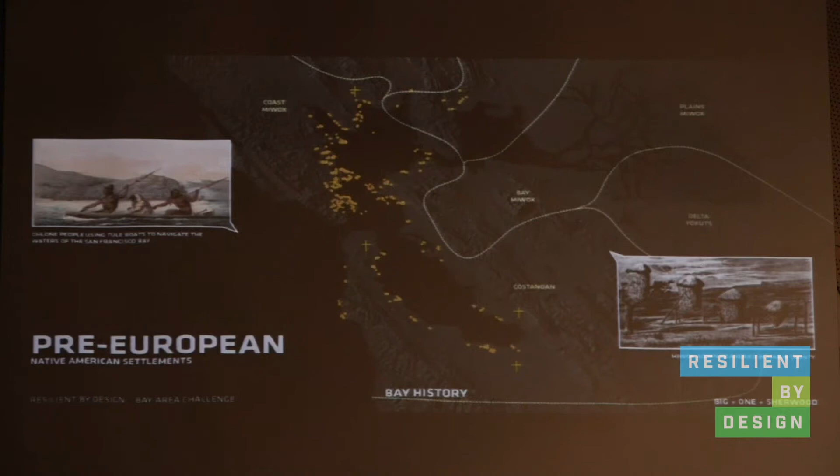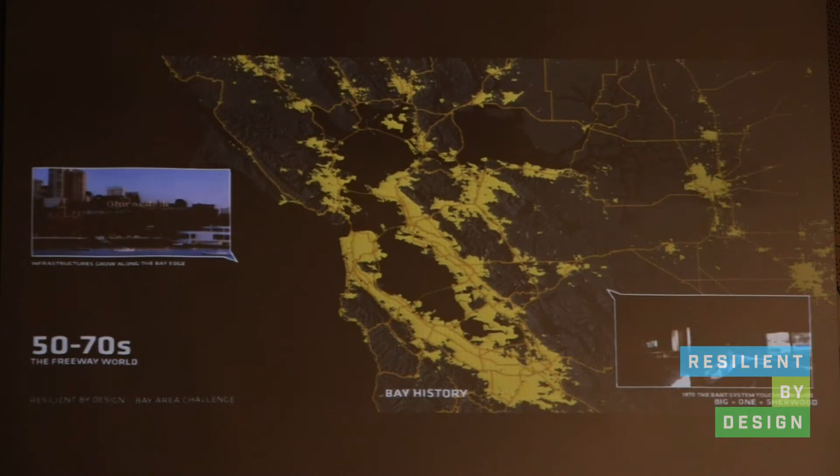At the same time, that occupation is the very thing that threatens it. If you look from early settlement, Native American, to a series of towns during the gold rush, the Bay has just kind of been expanding sequentially to the point that now it really works as one region, but at a scale that is disproportionate to any means to control it.

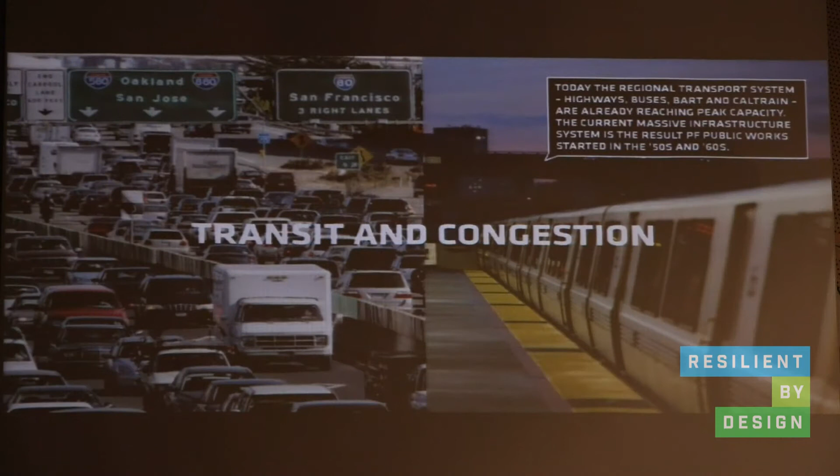And it's that kind of sprawl and development pattern that has led to the urban challenges that we know today, from transit and congestion to housing, lack of affordable housing and displacement that results, strained infrastructure bringing flows from far away, and ecological decline along the Bay's edge.

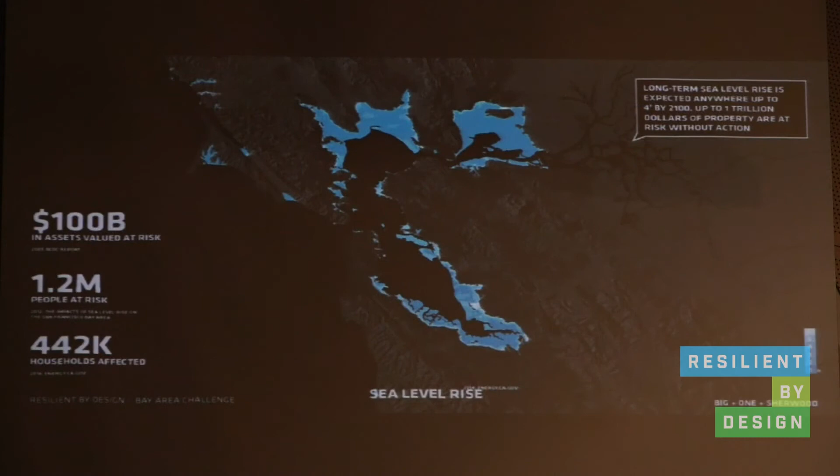Those development patterns and the kind of emissions and lifestyle associated with it have also been in part responsible for the climate stresses that the Bay feels today: from sea level rise and storm flooding, to drought and wildfires, to earthquakes and liquefaction.

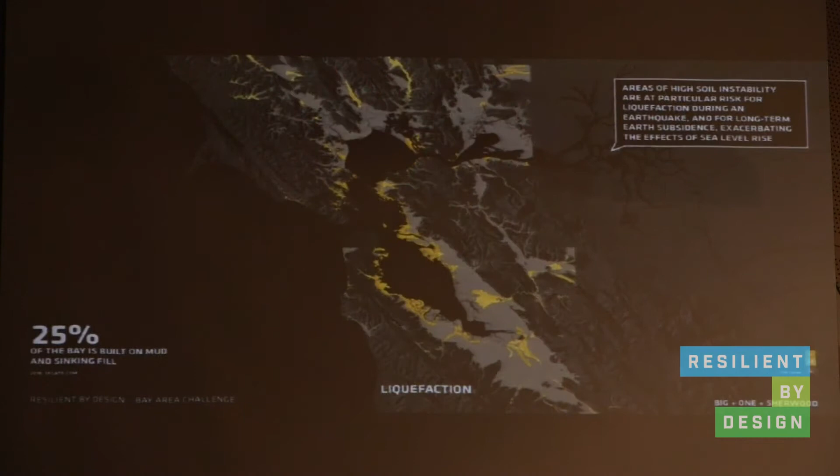Our approach to the Bay has been that climate stresses and urban stresses are really one. And in order to build a more resilient Bay, we need to work on both equally.

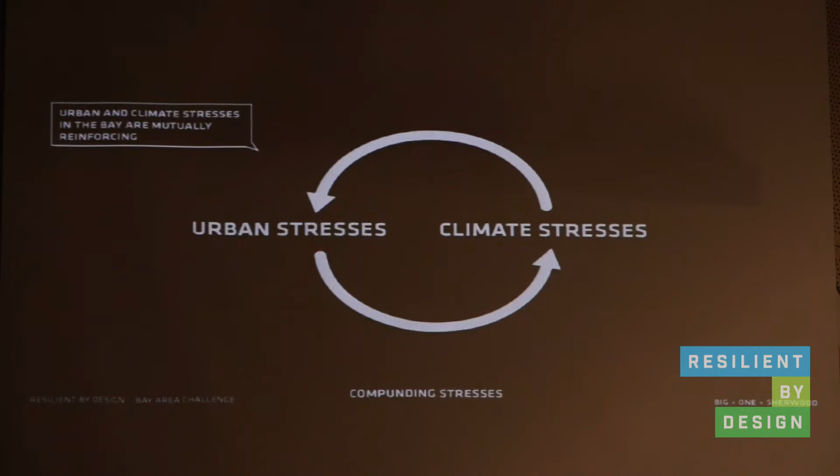Simply put, to become more resilient, sustainable, and equitable, and to deal with some of these challenges, the Bay needs to link its natural systems to its urban systems in a better way. It needs better transit. It needs more housing in the right places. And it needs to modernize and decentralize its infrastructure to build resiliency.

We're also cognizant of the way that things are done in the Bay Area, which is also a symptom of many cities, certainly in this country, where the silos of city making really don't talk to one another. I think in the Bay in particular, you see ecological discussions completely separated from urban discussions. Transit works on its own logic, and infrastructure and people all kind of work separately.

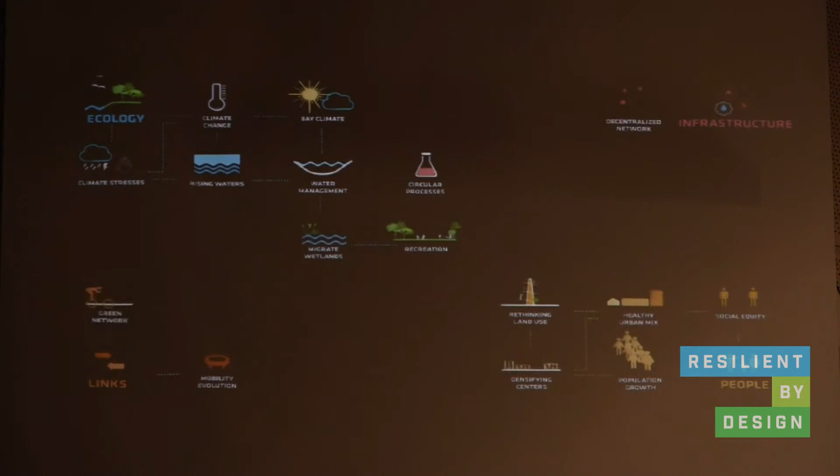Simply put, our proposal is that we need to think of all of these elements together as one, what we call a social ecosystem, where ecological planning provides a framework for growth, where growth responds to transit rather than the other way around, where all the incredible ingenuity and resources of the people of the Bay work to develop these systems, and where infrastructure is decentralized and localized into community.

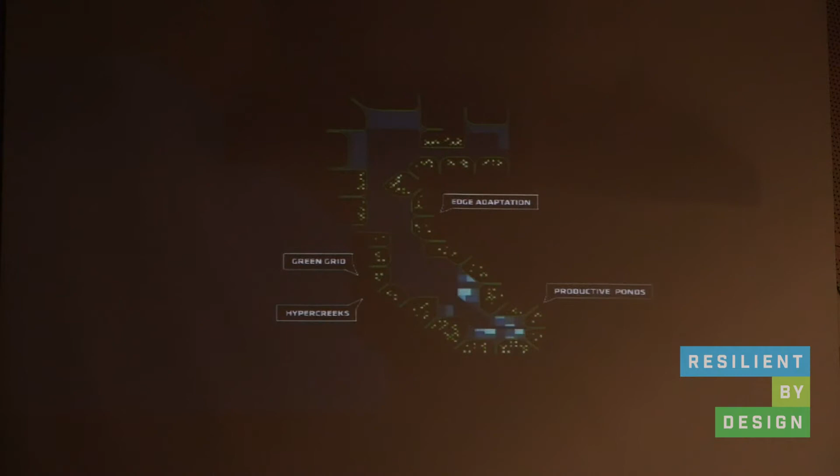Beginning with the creek system that once really defined the Bay, that's been culverted and tunneled over years and sprawled around—can these creeks become a new kind of framework for the Bay, allowing for an increment for sea level rise adaptation and a new unit of community?

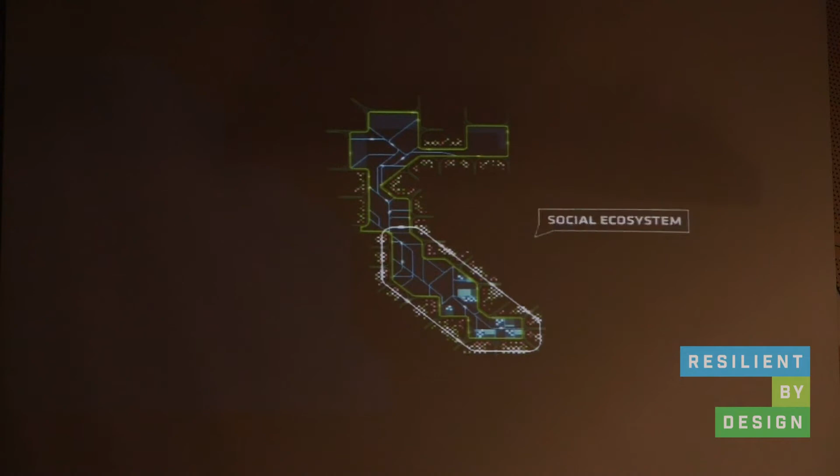Can we peel back decades of paved-over surfaces in the uplands, allowing for better recharge of the groundwater and fighting drought? Can we use the assets that the Bay has to build better transit rather than building new shiny infrastructure—use our roads, use the Bay itself, use our trails, and better connect things in a more flexible way? And can we rediscover the edge of the Bay, both as a place for ecology, but also as a place for people?

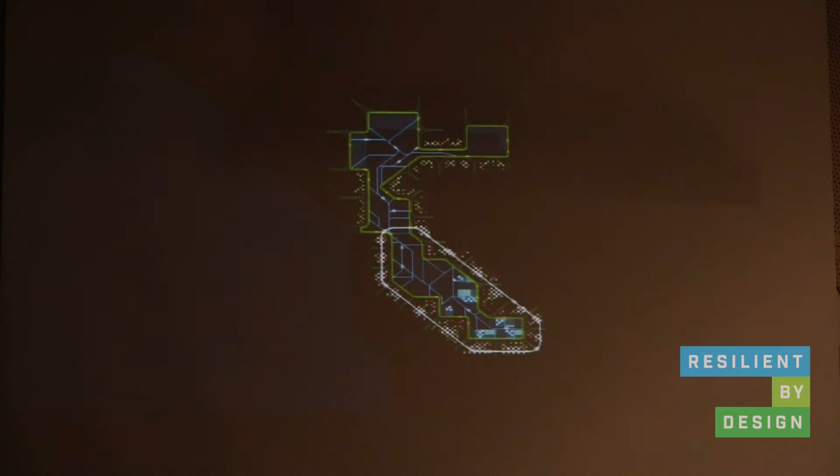So we've looked at three design opportunities, and to give you a sense of our process, we'll start with the first one up at the Golden Gate. Given that the initial frame for this competition was sea level rise, and it is one of the more acute risks in the area, we were curious about the dynamic between local adaptation, which we think can and should take place in order to adapt to sea level rise. It might happen in different ways in different parts of the Bay.

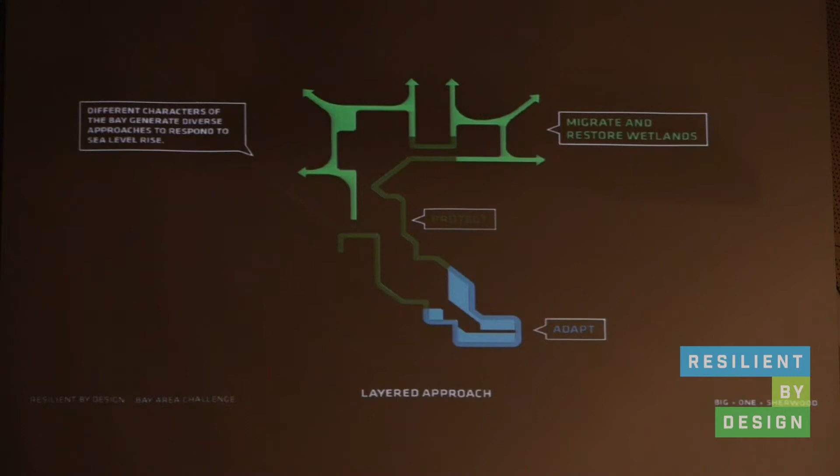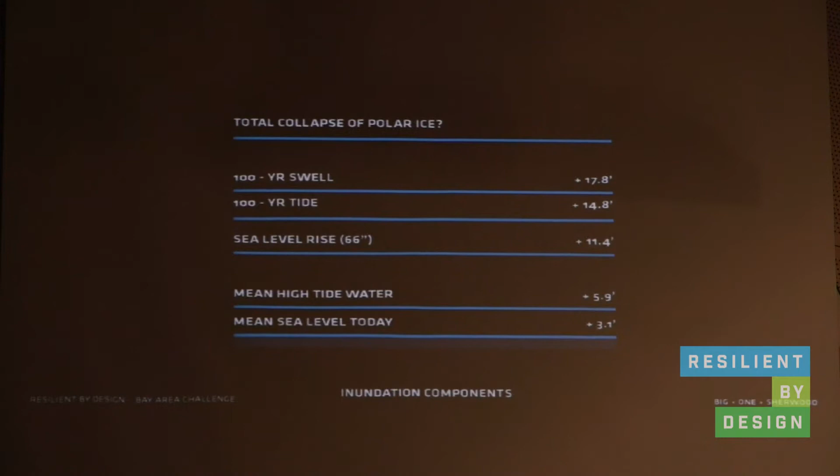But we also know that there's a lot of uncertainty about the extent of sea level rise and the kind of numbers we're going to be dealing with in the future. So we were interested in looking at a regional strategy that would take a component of this risk, tidal, annual king tides and storm surge, and deal with it on a regional level.

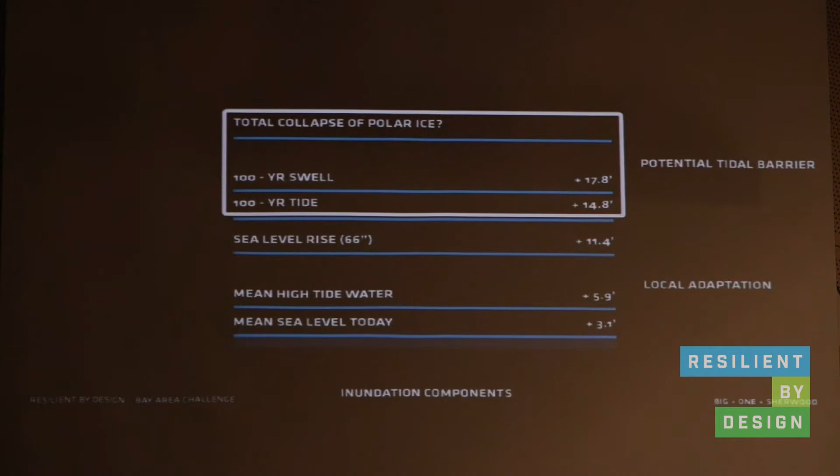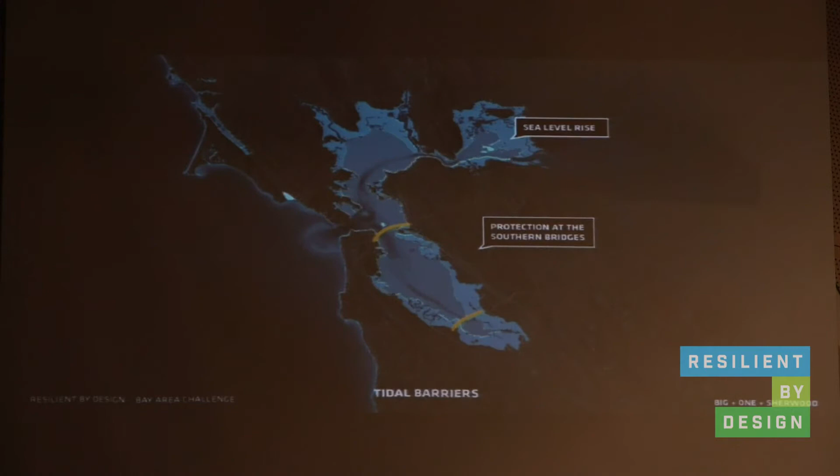We looked at the difference between 500 miles of investment in levees to keep up with potentially extreme height, and also a series of locations for tidal barriers, including the Dumbarton Bridge, the Bay Bridge. And then we looked at the Golden Gate Strait itself, the location of the BCDC competition several years back.

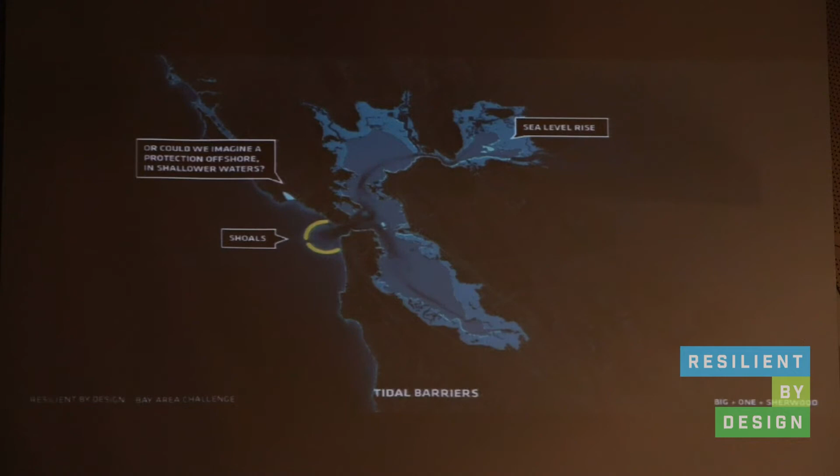We developed an alternative proposal for this area, which would build on the 7-mile crescent of shoals left by sediment deposit coming out of the bay. Using about 30% of the material it would take to build a barrier in the deep prism there, about 7 million cubic yards of fill, you could create a barrier that would take care of those more extreme levels of sea rise and tidal inundation while allowing for maritime traffic and so on. So this is something that we think is interesting.

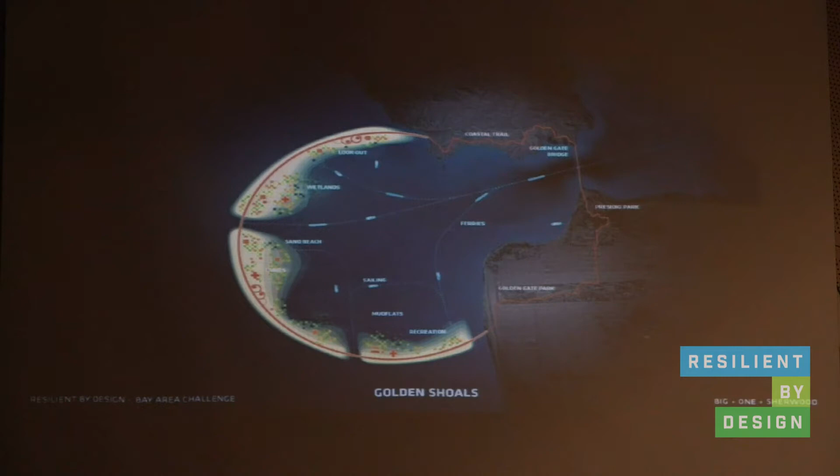It's something that we think should be looked at, but we also focused our attention on a series of other sites at a more local scale, starting with Islais Creek.

Okay, thanks, Jeremy. I will do my best to see the screen at this angle. Well done. Bry Sarté with Sherwood Design Engineers.

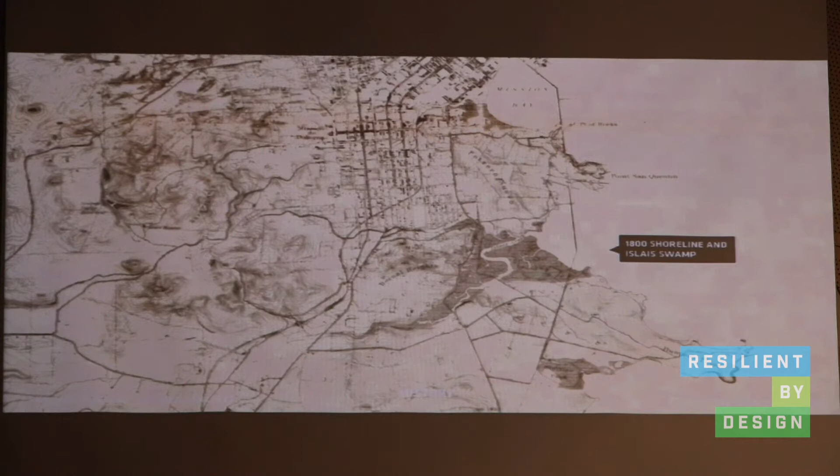Islais Creek is, I think, a really important site that's been at the center of a lot of the industrial activity in San Francisco, and is also the site of one of the original ecological and wetland systems that no longer exist in any serious scale in San Francisco.

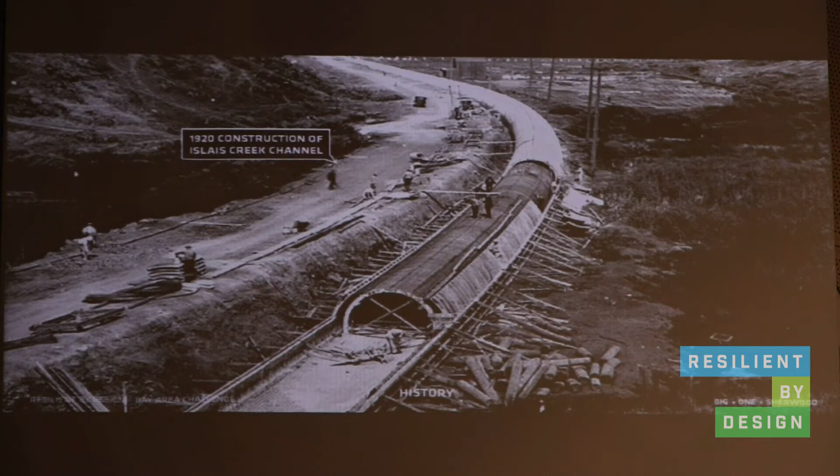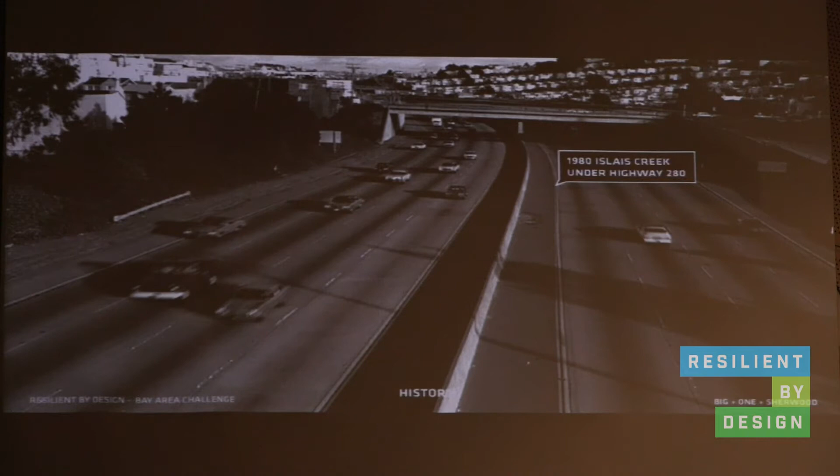This part of San Francisco was culverted and put into creeks at the formation of the city and the development of the southeast part of San Francisco. The need for the expansion of freeways and circulation infrastructure has added additional layers on top of Islais Creek for circulation and transportation.

Beyond that, this has become a hub for a lot of the maritime activity and port activity on the waterfront, which has changed in nature and scale over time, but still has a deep water harbor and significant productive use, including providing a number of jobs, which we've heard from people living in the neighborhood are extremely important to preserve in that location.

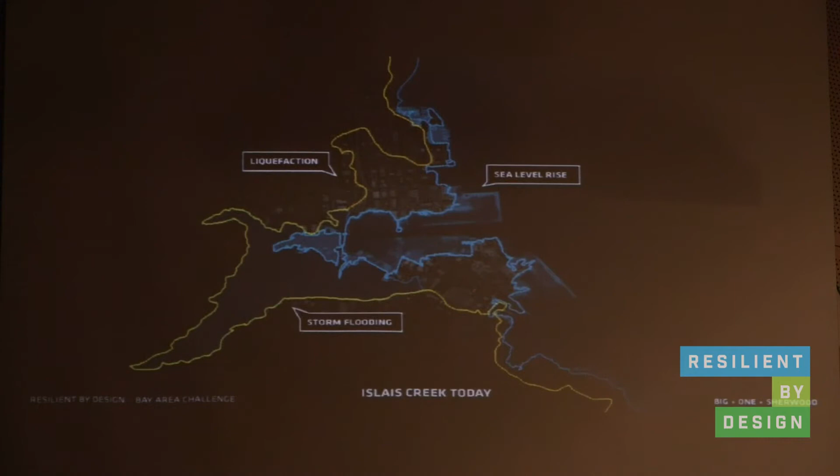It is a very challenged part of the city from a sea level rise and flooding perspective, not just at the waterfront, but all the way up to the top of the ridge near Twin Peaks, where in this watershed basin there is flooding very often that creates a combined sewer flood condition in a number of parts of the neighborhood. So our proposal would start to address that, and in particular, much of the industrial land that is in purple in this slide is positioned in what was historically marshland in this part of San Francisco.

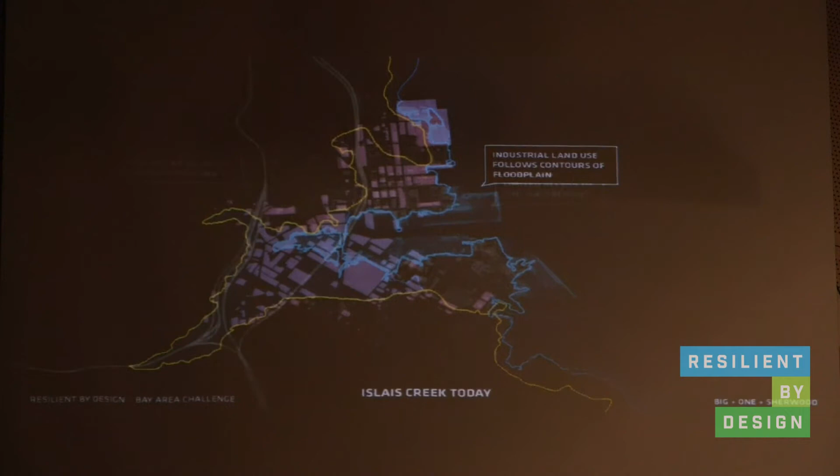Here we've overlaid the major 2 freeways that run through this neighborhood that effectively connect or pass over the 2 residential communities of the Dogpatch and the Bayview, Dogpatch to the north and Bayview to the south.

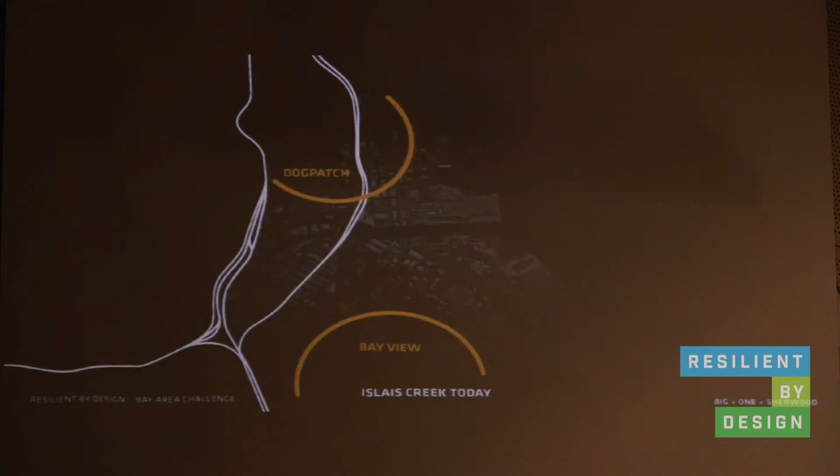So we see this part of the city as an incredible opportunity. It's one that the city has put forward as a design opportunity for us to consider, and so we've taken a really bold approach, we believe, to say what could be possible here. It started with listening to people in the neighborhood, to touring all the different sites with many of you.

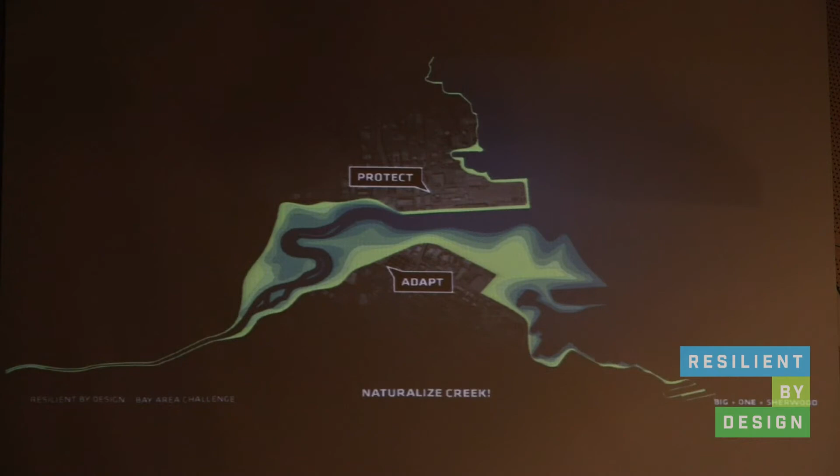Our proposal starts with an idea that really says, could this be a place where San Francisco creates a 300-acre restored wetland and riparian system as part of a restored marsh? Could we take what is now a small inlet that once was one of our most important creekways and really restore it substantially to the south and to the west, and take advantage of a rare, if not the only, last opportunity in San Francisco to really think about managing stormwater and floodwater in a different way.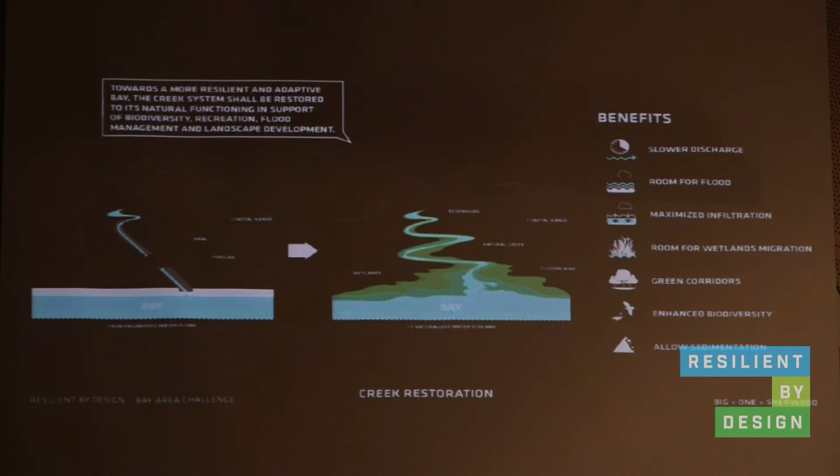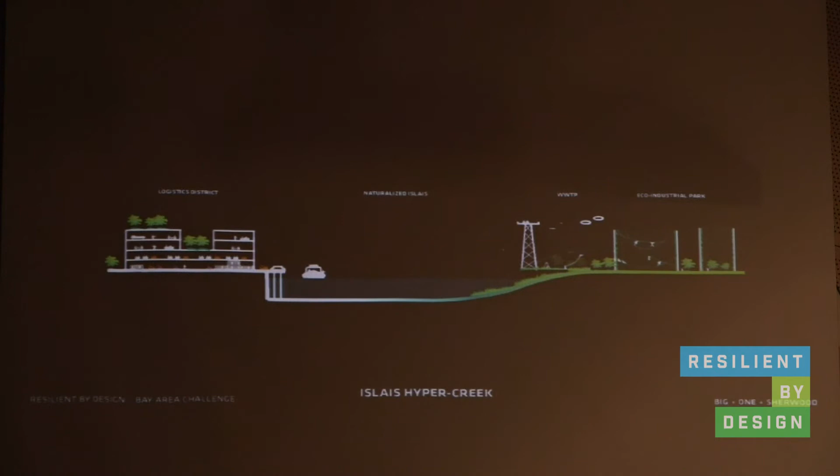And to take the existing channel and transform the southern side, to take some of that 300 acres of industrial land to create vertical industrial development opportunities for a net positive increase in density and development of this neighborhood, to provide more jobs than there are today, but in a more compact location that allows the ecology of this to come closer to its original form.

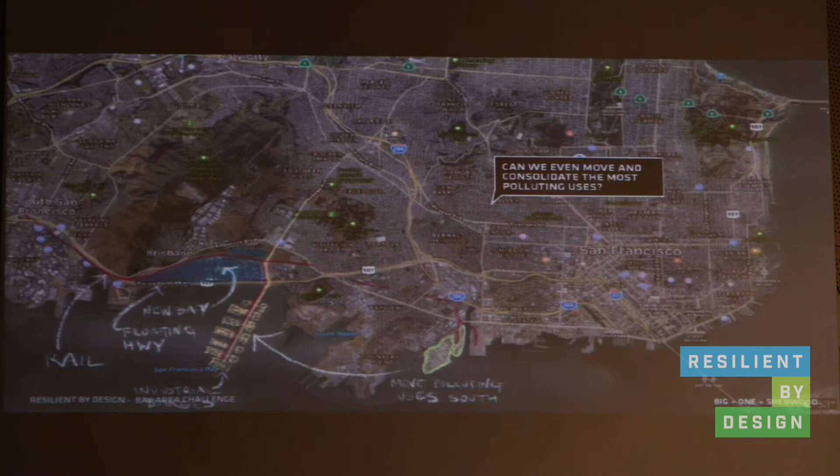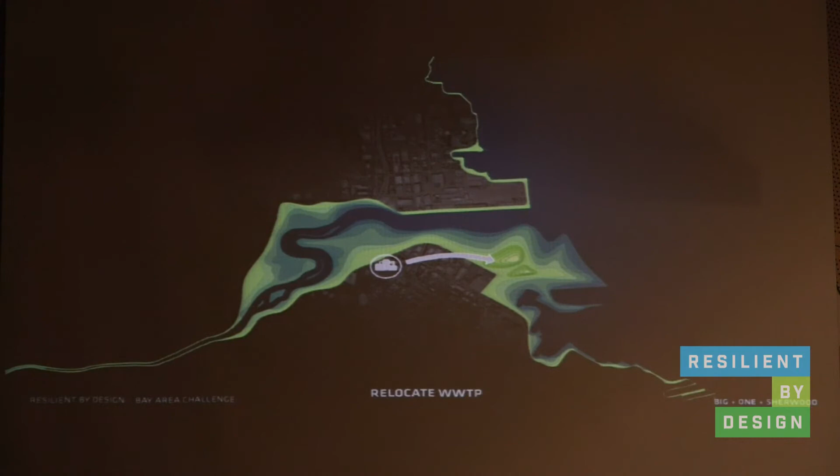So you can start to see this evolution that might actually be facilitated by moving some of the heavy industrial uses potentially to a new series of barges or a reconfiguration of Brisbane Bay to the south, and potentially even relocating parts, if not the entirety, of the wastewater treatment plant currently adjacent to the Bayview neighborhood. We don't have all the answers in the sequencing, but we have a good idea of the process today and the potential evolution to more ecologically integrated means of managing and processing wastewater at this massive facility, which today takes 80% of the city's wastewater.

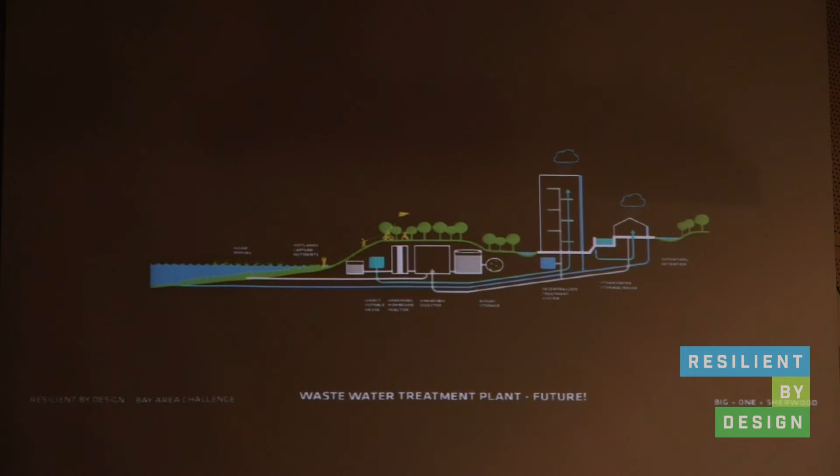Could that start to be thought about differently? We think so as part of our proposal. And I think Jeremy is going to continue with a couple more ideas.

Sure. So this gives you a sense of the resource recovery park and plant on the edge that Bree just talked about.

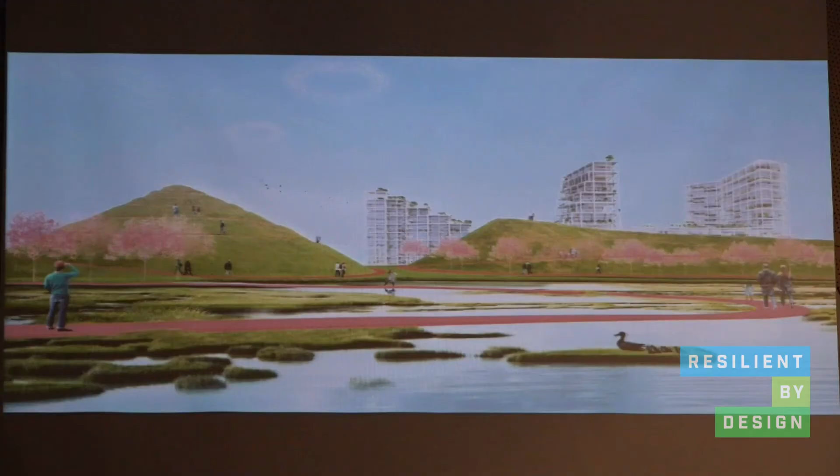So what all of these infrastructural improvements do is provide a frame for resilient growth. And as Bree said, what we heard loud and clear from the community when we visited was that the kind of industrial jobs in the neighborhood should not just be protected, but increased.

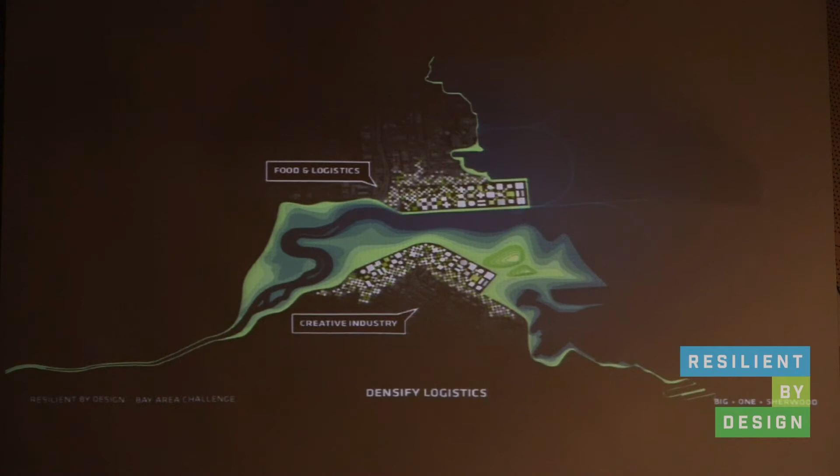So what we propose is a densification of industry, logistics connected to the Deepwater Port, maintaining this area as a critical node for San Francisco to its south, and taking this low-rise industrial area that sits in the floodplain and really densifying it.

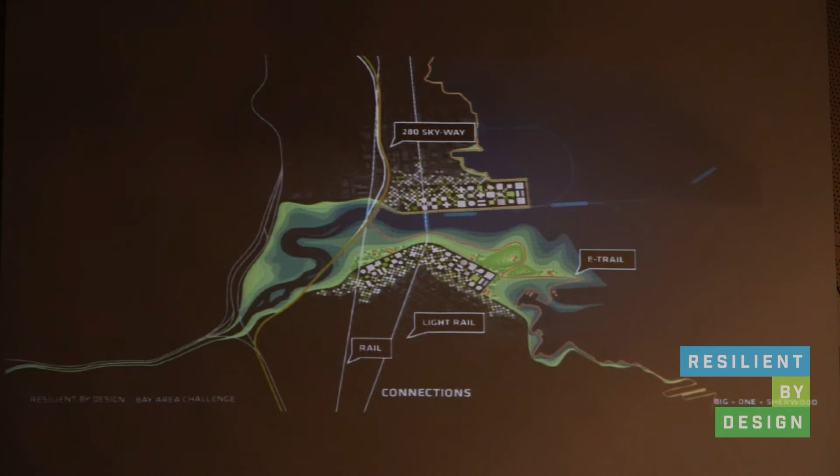We also see opportunities to connect. I-280 has been contemplated for a long time, this spur that juts off of the 101 and runs north, for decommission and potential demolition. For us, the cost of demolishing it might actually be better spent to enhance it, not as a machine for cars, but rather as a machine for light mobility, for pedestrian connectivity, with spurs reaching into the neighborhood.

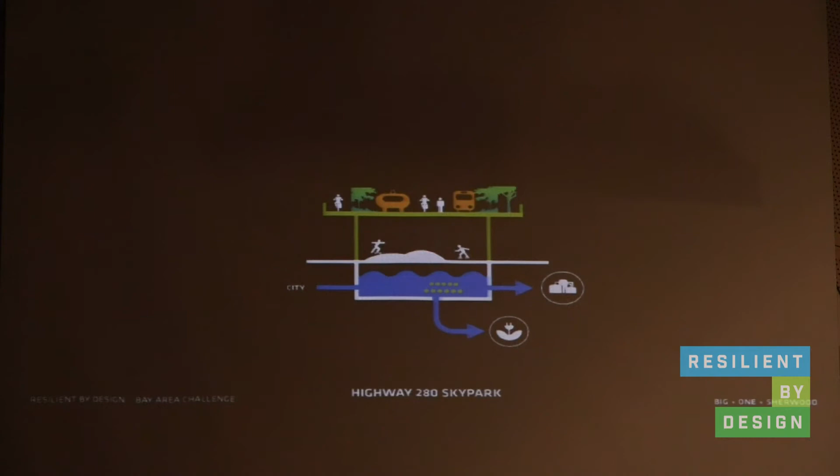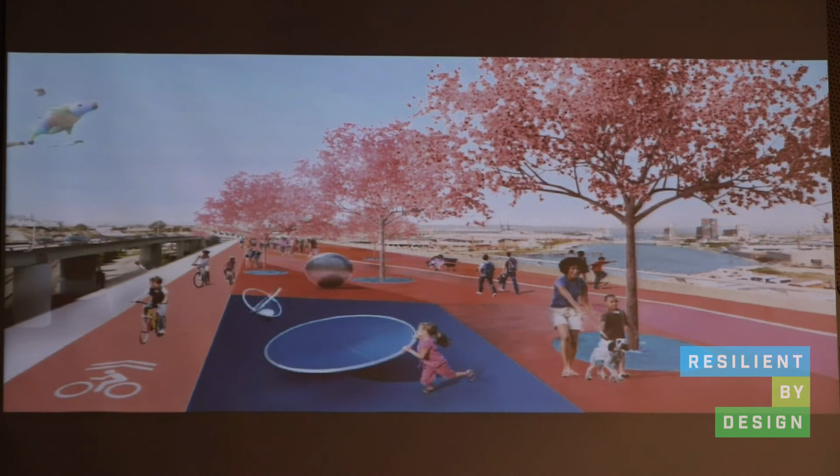This is Islais Creek in the background. So from a gray, kind of tunnelized, culverted creek, disconnected along the transect, to an activated natural and also industrial heart for Bayview.

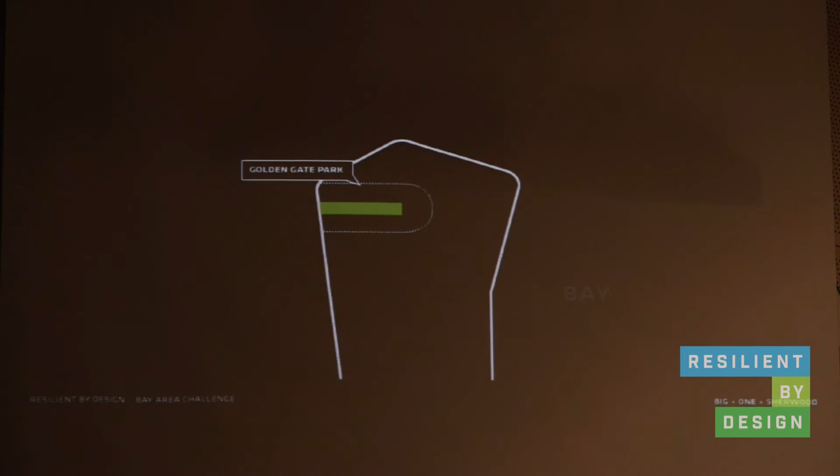We also see this really as no small plan. If San Francisco itself has Golden Gate, which serves a huge area around it, there's really a lack of this kind of open space in this part of the city. So we really see Islais Park as the green, resilient, and industrial heart for this part of the city.

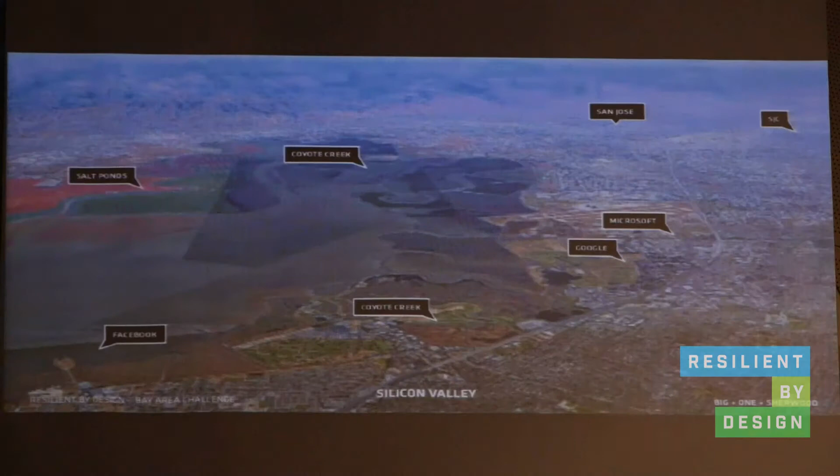So I'll talk a bit about the South Bay design opportunity that we have. And of course we call it South Bay Living because we think South Bay is known for many things, but not really for living. If you can even afford it, it's not good for living. It's for traffic jams, it's for Silicon Valley, it's for inequity and all these things.

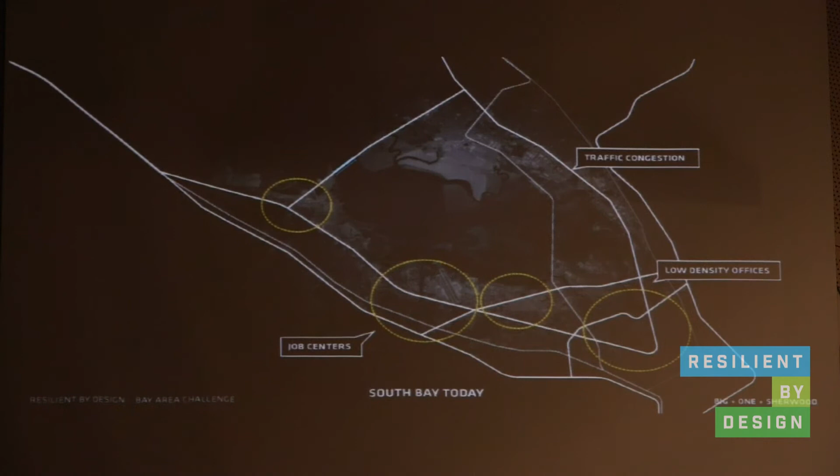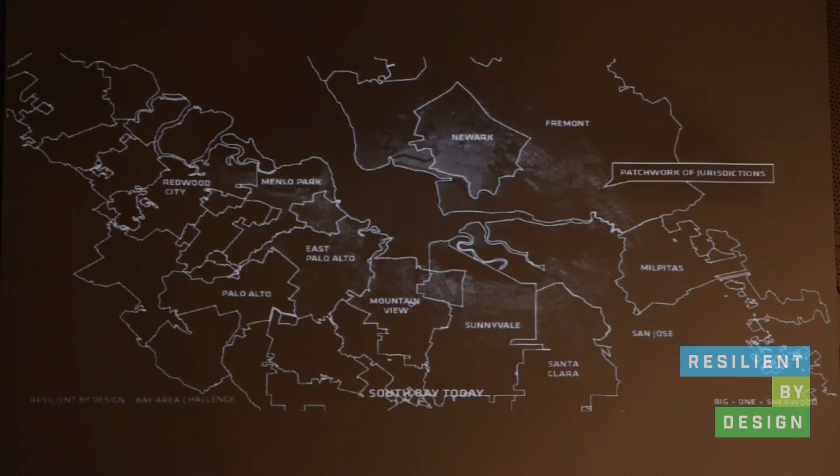One of the things about South Bay is that you see many of the urban stresses coming together there, and those will be compounded by climate-related stresses from sea level rise. We feel it's very difficult to address these stresses so far, in part because of the atomized way in which the Bay has organized itself.

So what we think and what we want to propose is a systems perspective on the South Bay, which maybe starts with thinking about mobility and transit, where you see that it's really car-oriented. Caltrain comes there, but hardly anyone ever uses it, which is logical because there's no way to get from the stations to the different workplaces that are there.

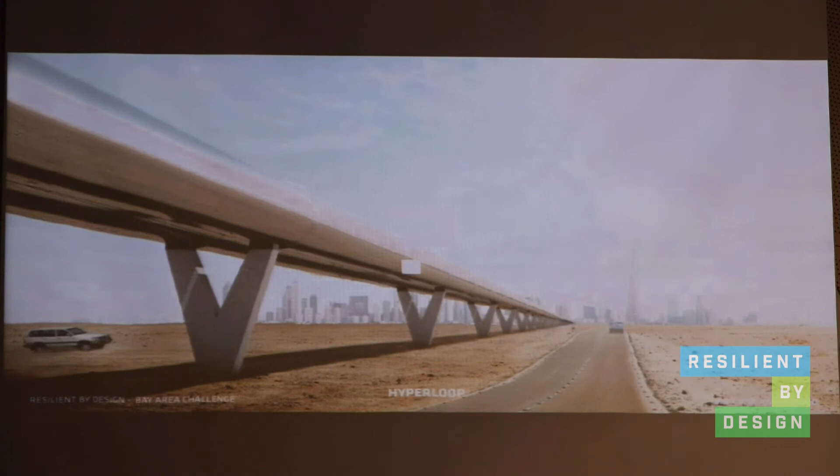And that's why even big ideas, which we all enthusiastically work on—specifically Jeremy and his firm, like the Hyperloop—are things we don't think are opportune here. We think that, especially given the innovative culture there, you might really look at developments in mobility technology, and look at the existing assets that are there: the trails, the highways, maybe even the ferries.

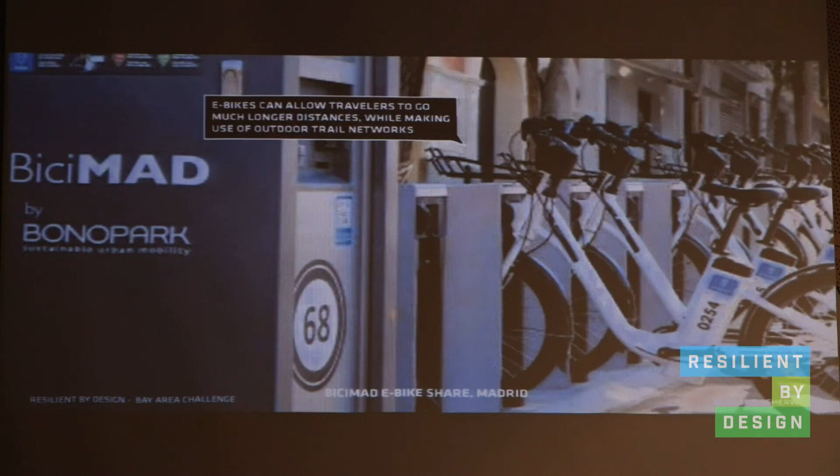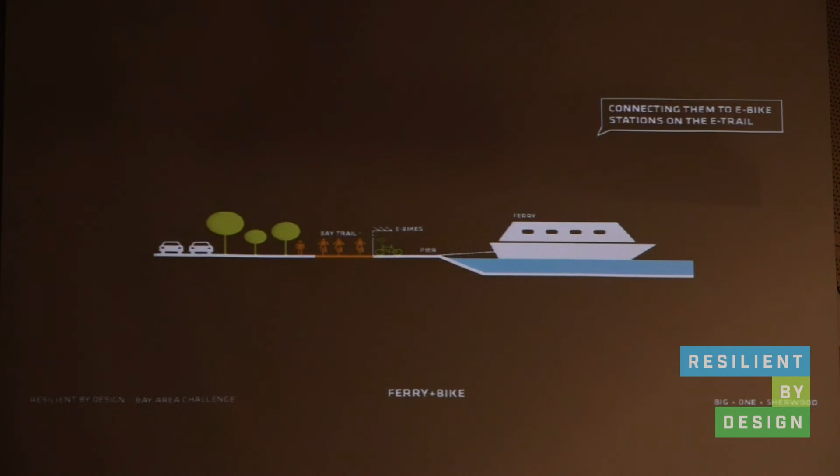So we think that if you want to approach mobility, you might start thinking: can we activate these trails for e-bike mobility? Can we start to think how these e-bikes could connect both to the uplands, to the different workplaces, but also maybe to a ferry-related system. This ferry boat is of course too big and would have difficulty getting into the South Bay, but you can imagine that in the future, especially with sea level rise, there are whole new sets of ferry technologies that can actually work very well there.

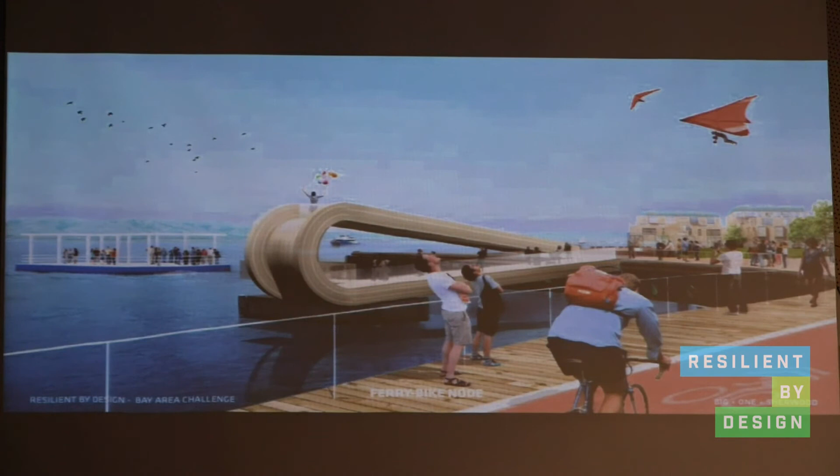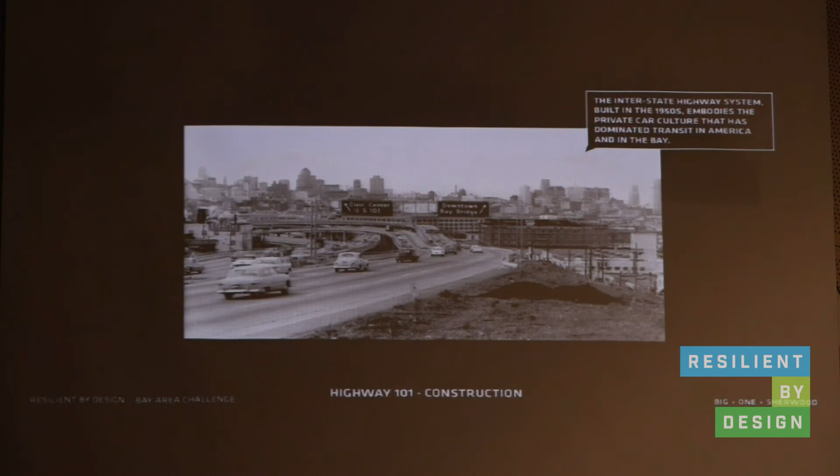A second component of that mobility strategy would be to rethink the highways, which are now big, clogged arteries through the South Bay.

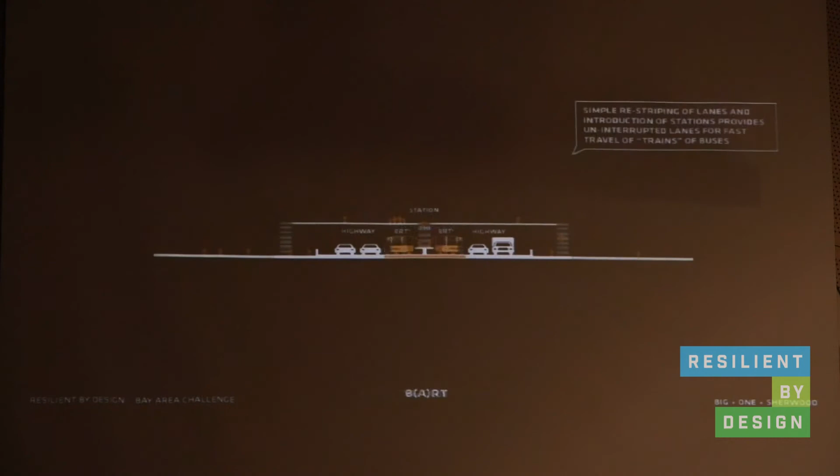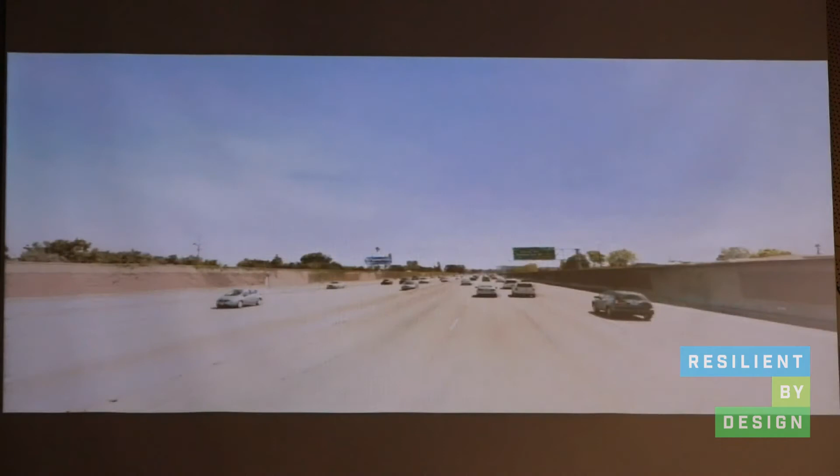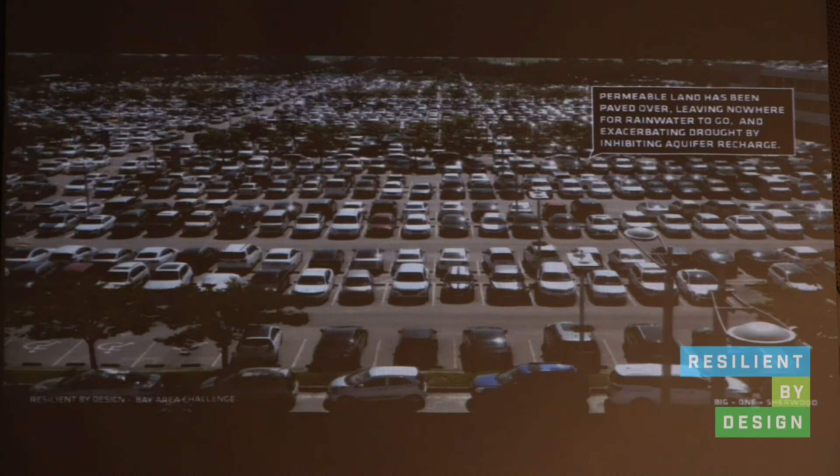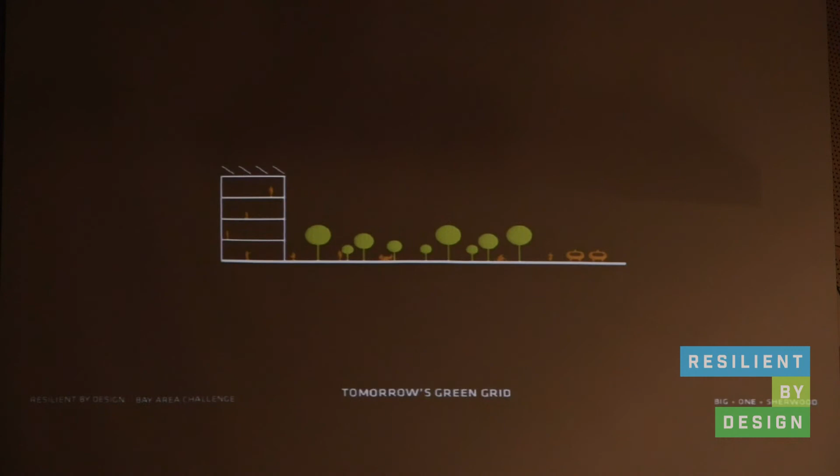A second component of that thinking is once you start to think about how we can use these developments in vehicle technology, you start to look differently at these parking places that are now large swaths of impervious surfaces that might not be needed in the future because of mobility changes. We can densify them in parts, build other programs there, and at the same time green them and create spaces for water, turning the gray grid into what you could call a green grid.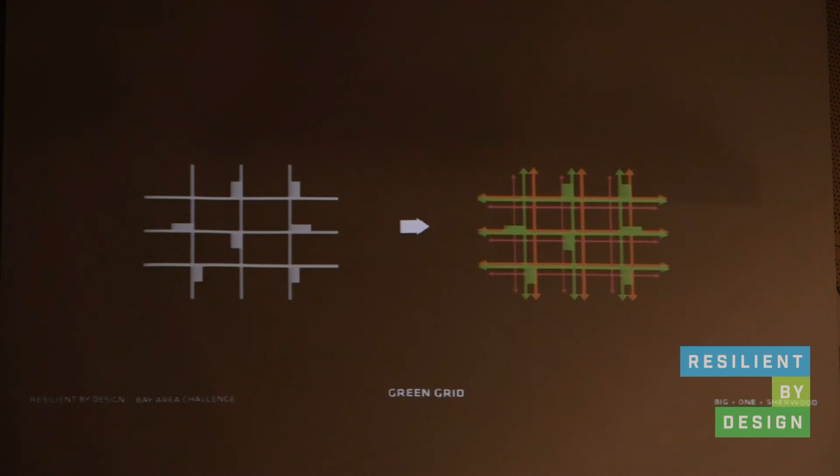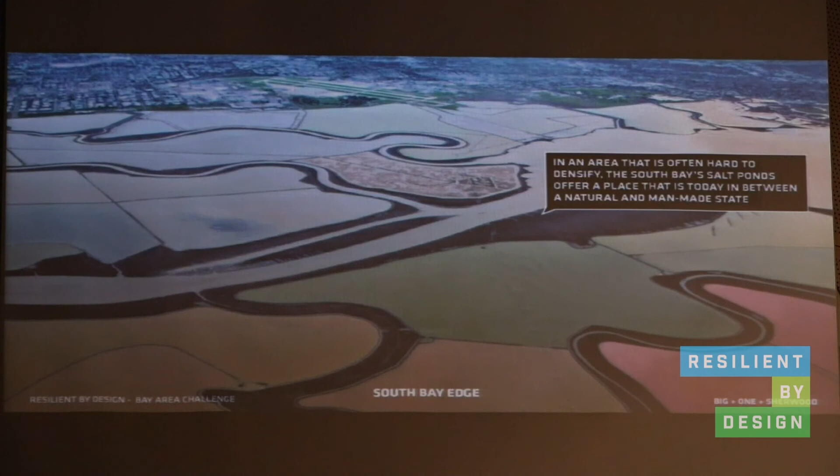We made the calculations and figured out that more than 500,000 dwellings plus a lot of jobs could be done at a relatively modest height. If you link those two systems together, you can start to think about a densification strategy in the South Bay, to which a third element, the ponds, could be fantastic assets.

These ponds, as people have talked about, we think will not function in the long term as a nature system, as a natural system. They've never really been that, so we think they should be explored as a constructed environment with a lot of different functions they could have.

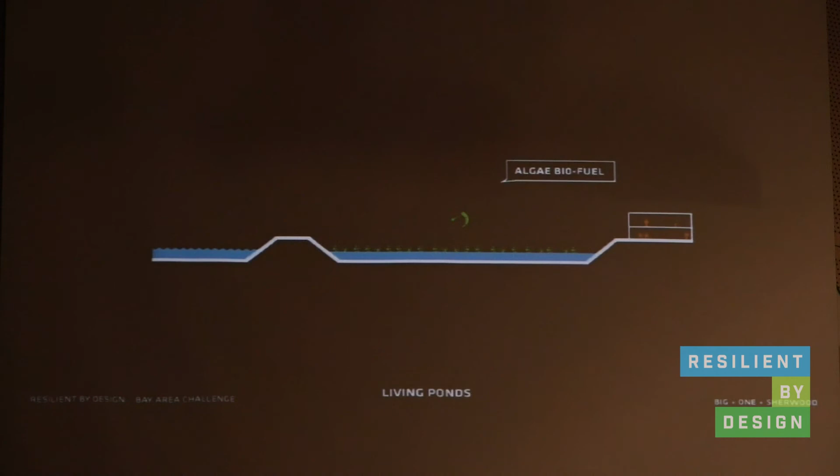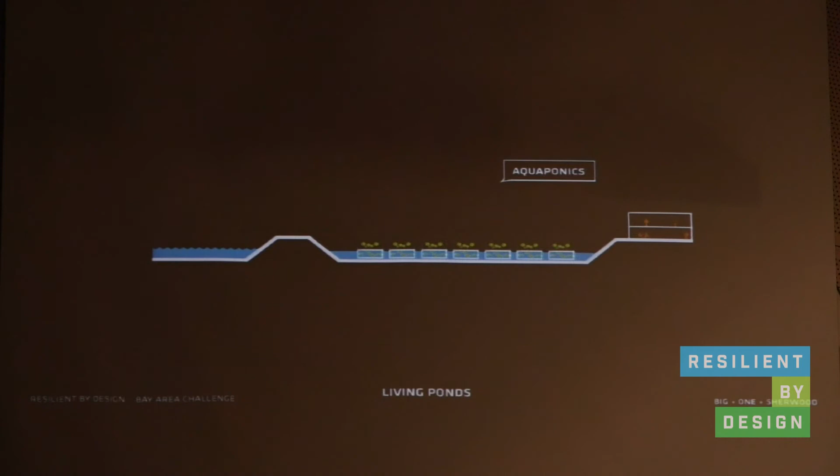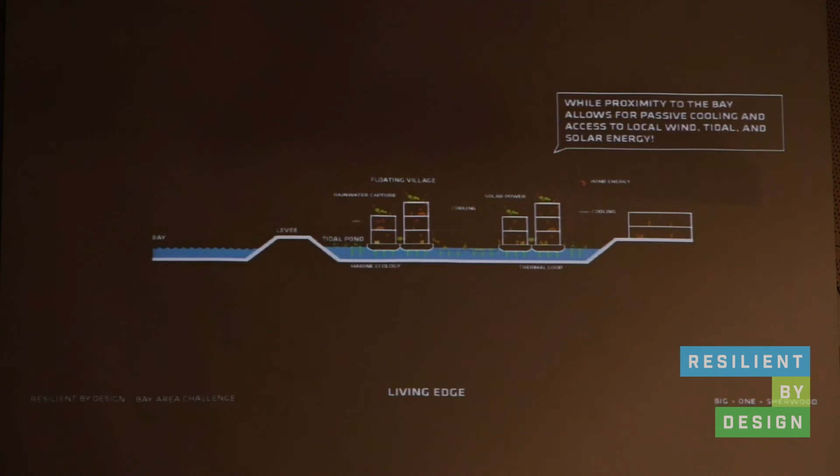Ponds could be there for algae production. They could be used as batteries. They can be used to retain stormwater. They can do solar. And once you start thinking about that, you can start thinking about floating villages there that can also become interesting elements for innovation, linking these systems together on a smaller scale.

We feel that as we talk to people in those areas and understand their stresses, but also understand their forward trajectories, there's really a project that not only works to create a lot of housing and a different view on mobility, but which can also give a different sort of signature on the bay.

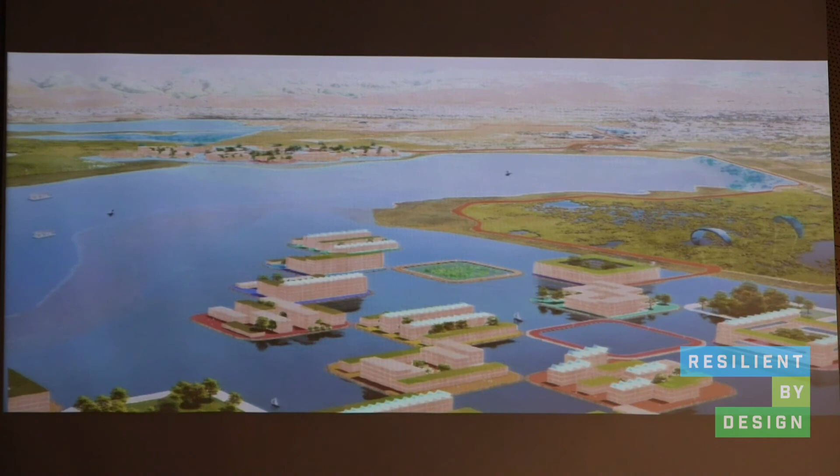I'm going to let these films roll and give it to Jeremy. So imagining, as Matthijs said, not only infrastructural functions, but also living at the edge.

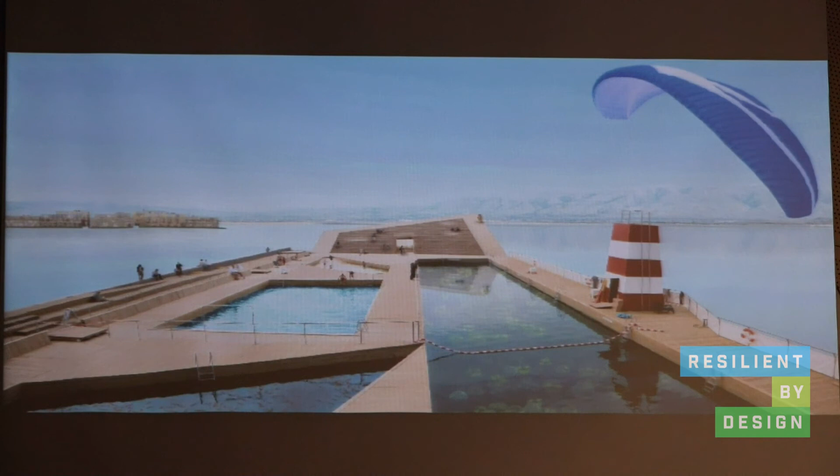So I'll just close by saying that for us, climate change adaptation is about solving problems, but in the end, it's also an incredible opportunity to make places better. So whether it's South Bay having a new kind of appeal on par with South Florida, or a new green, resilient heart for Islais Creek, we really see opportunities in the Bay to rediscover nature, to rediscover all of the systems that have been disconnected from one another, and create a better place to live. Thank you.